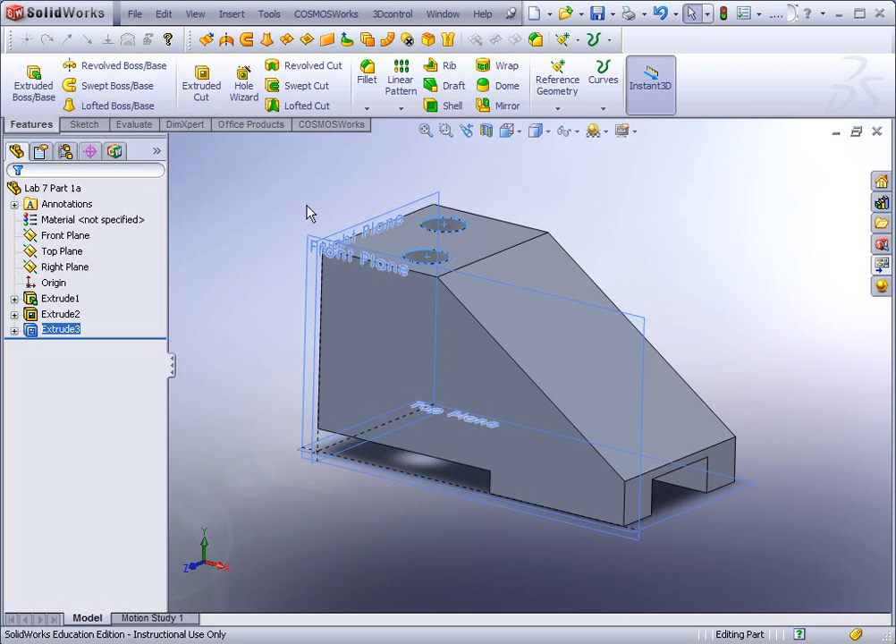While you're in your part file, with it saved, go up to File, Make Drawing from Part, select CAD 154, and click OK.

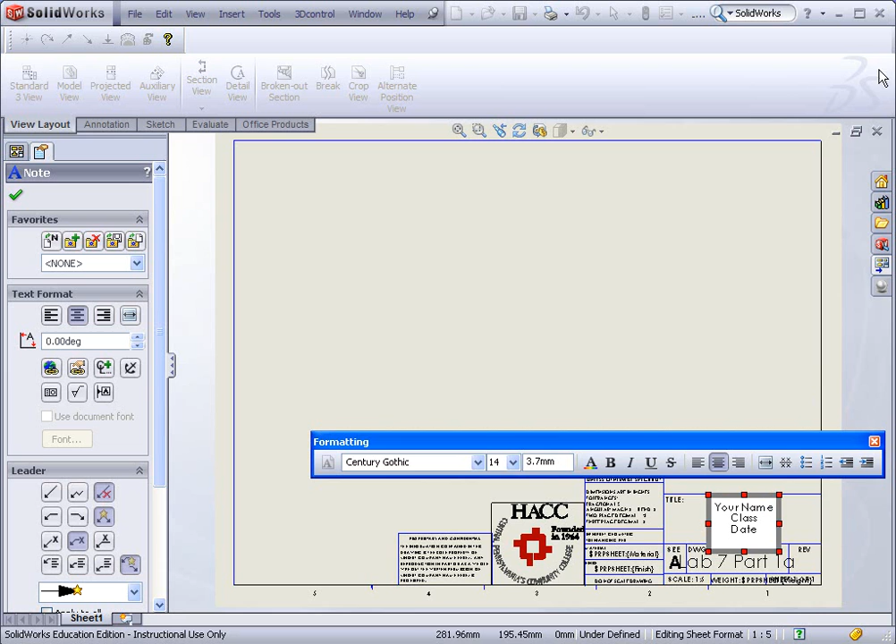Click on the drawing sheet. At this point you can edit stuff. One thing you'll want to do is double-click down here on the template and type in your name, edit your class info and date. This text down here will change to the title of the part file when you save it.

If you right-click up in the drawing area and go to Edit Sheet, you can now edit your drawing sheet. Come up here and select Model View. Since your part was open, it will display in this Open Documents window. Double-click on it.

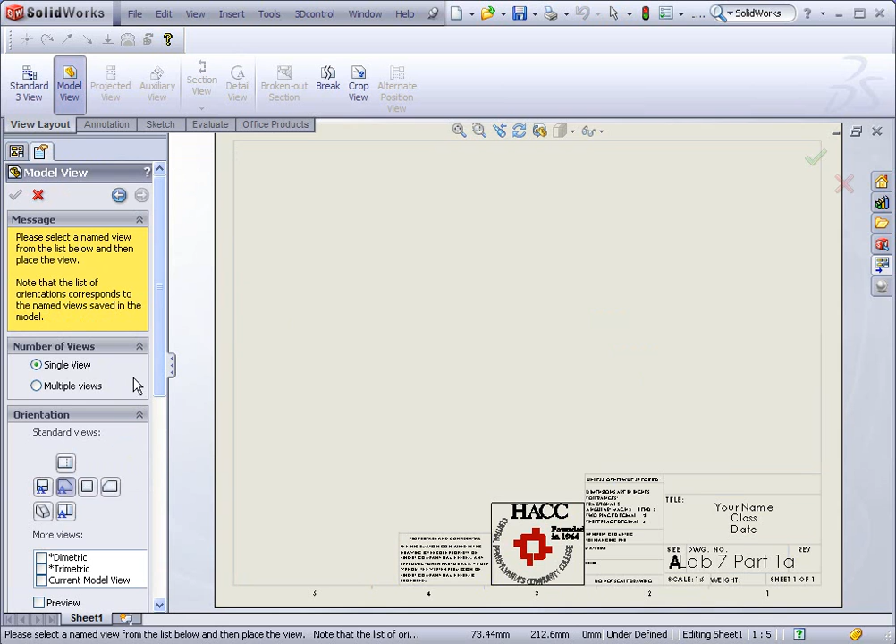This window down here shows you which view you're in. It's going to display the front view first, so we're going to click here. There's the front view of our part.

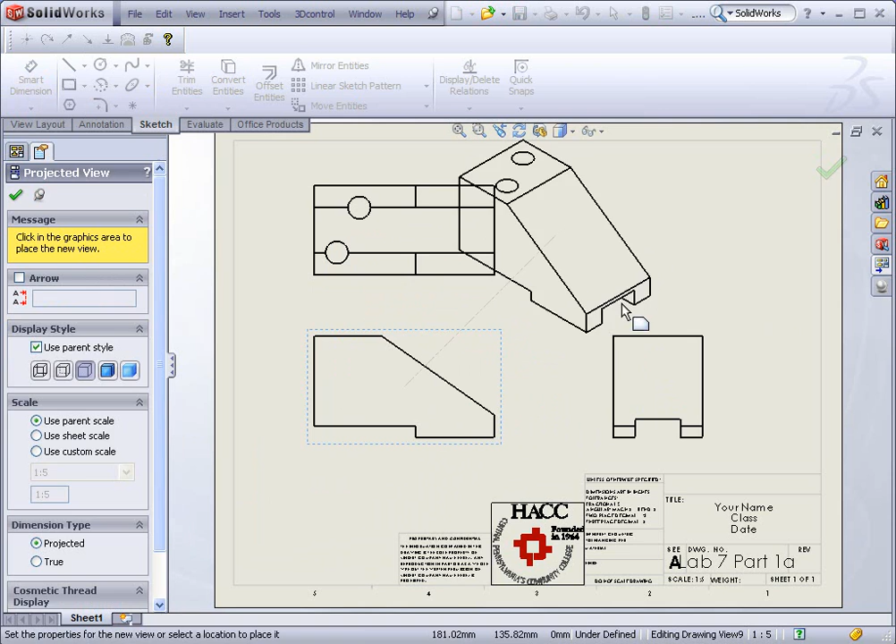When we drag up, we should have our top view, and when we drag over to the side, we'll have our right side view. Sometimes your settings are set for first angle projection instead of third. To change that, right-click, go to Properties, and select third angle projection, then click OK.

Now our views are oriented in the fashion that we're familiar with.

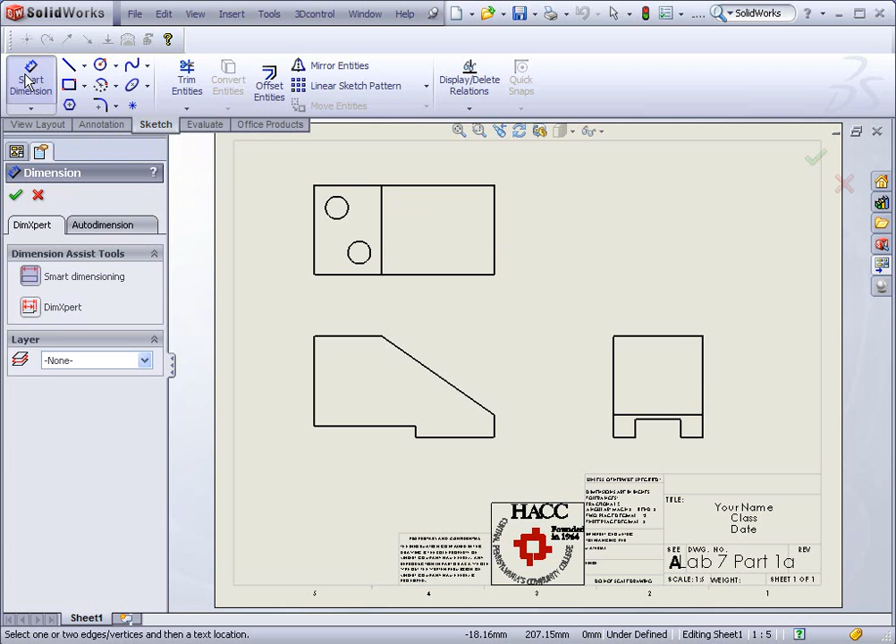Your dimension tool is up here, or you can import dimensions. I'm going to select my Smart Dimension tool, then click Auto Dimension, All Entities in View, and check Apply. So it's entered them on this view.

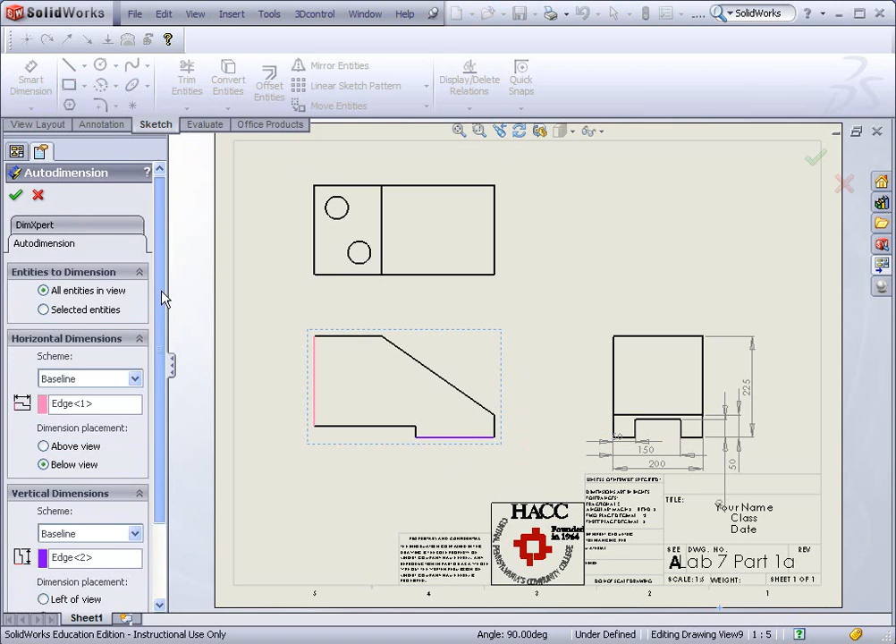I'm going to select this view over here, come up, Auto Dimension, select this view, come up, check OK. There are my dimensions.

Now, a lot of times it's good practice to move your dimensions around and get them set up so that the reader can understand what's going on.

The last one I'll auto dimension is the top view. Check OK. So this gives me my positions for each of my holes.

Some of these dimensions are redundant, so I'm going to delete them.

Again, you want to position each of your dimensions so they make the most sense to you. The last thing I'm going to do, I need to edit some of these over here. This one's redundant. This one's also redundant.

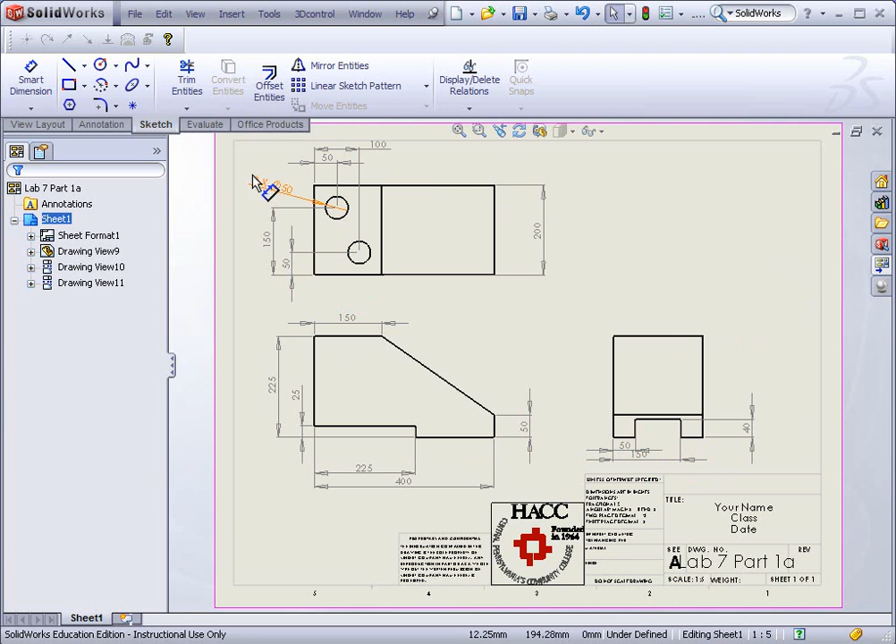The other thing is I prefer ANSI standard to ISO, so I'm going to come up here to Tools, Options, Document Properties, and select ANSI instead of ISO. That makes the dimensions look a lot cleaner.

Finally, when you go and save this, you're going to go File, Save, and you want to save this as Lab 7 Part 1a, and then click Save.

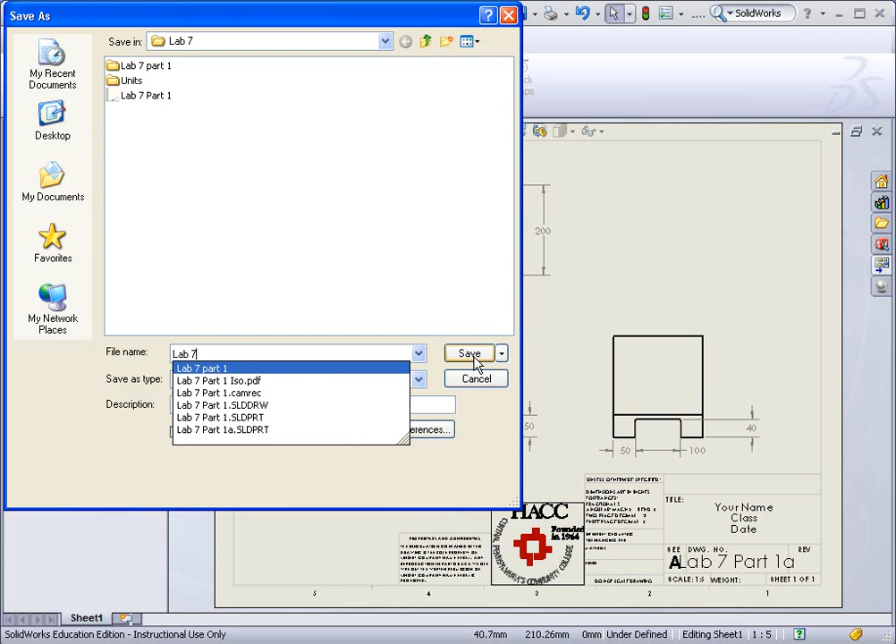If you notice down here, your title has changed to match your Lab 7, and this is Sheet 1 of 1.